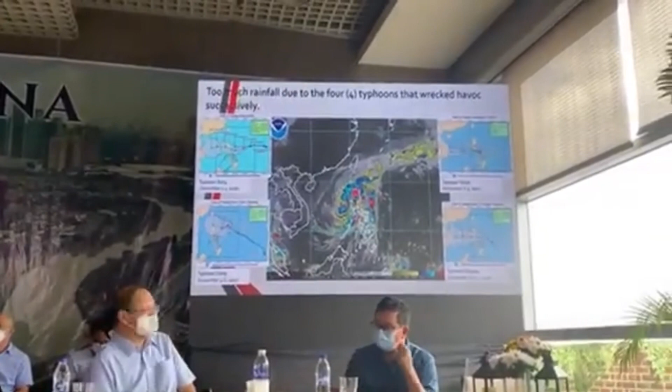Atin po munang bisitahin ano po ba ang nangyari dito sa parte ng Marikina River during that time. If my clicker allows, let me click it next. Series of slides pwede po natin pagbasihan. Actually, it is not only Typhoon Ulysses that affected us. You may focus your attention on the screen. Before Typhoon Ulysses on November 11 and 12, 3 typhoons visited us, this area. Typhoon Rolly on November 1 and 2, Typhoon Siony November 6, and Typhoon Tonyo on November 9.

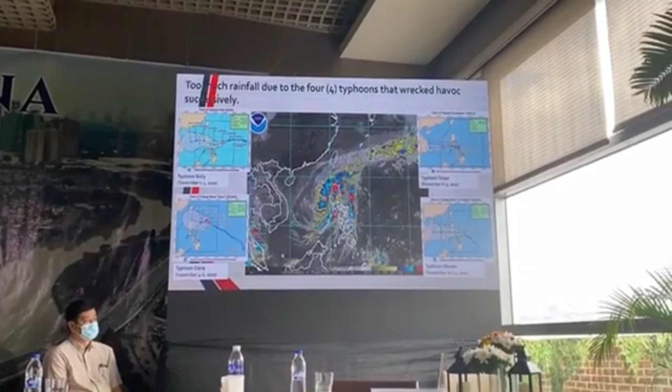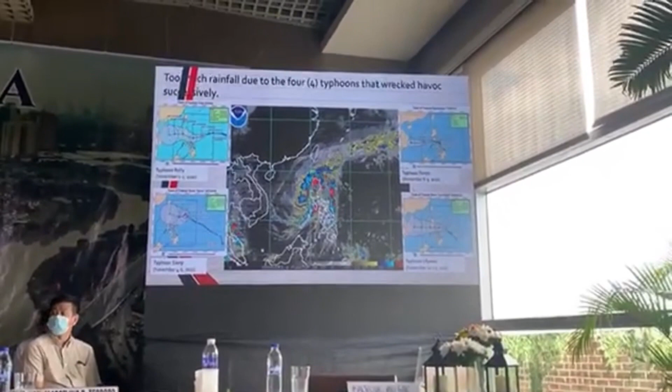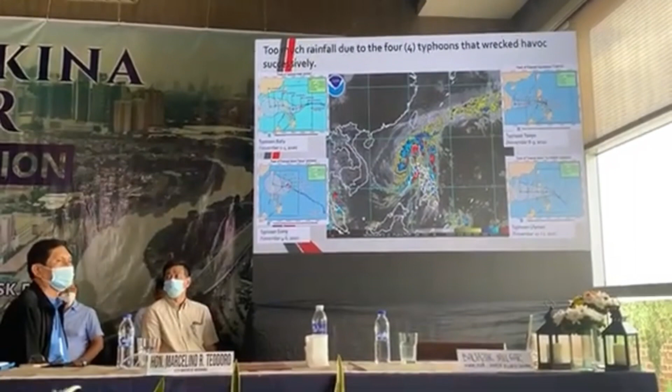So 4 typhoons affected this area of Metro Manila, specifically this area of Pasig Marikina River Basin, that super saturated our area. Ibig sabihin po, basa na ang ating mga tubig, ang ating kabundukan, ang ating catchment area, and with the passing of Typhoon Ulysses, hindi na po kinaya, and Typhoon Ulysses is more than a 1 in 100 return period storm. So napakalakas po talaga yan. And so we saw the pictures during the time. Next, let's just get through pictures.

We woke up in the morning of November 12, kung naalala nyo po, that Metro Manila was hit by a very bad typhoon or flooding that is considered to be highest in recent years. Again, kumpara kay Ondoy in 2009. Kung titignan po natin, Ulysses happened in 2020, just a good 11 years. Nakakatakot po yun. Why? In hydrology, there is what we call probability or incidence, the occurrence of high magnitude typhoons. If a 100-year return period flood would occur bukas, delikado po tayo. If it occurs within a 10-year span, then masyadong malakas po ang magnitude ng bagyo na dumadalaw sa atin.

And with the advent of climate change, there will be more intense, there will be more frequent, and there will be more typhoons coming in the years to come. Ito po ang babala sa atin. That's why we saw in the news, nagulat tayo, baha ang Metro Manila, ang Cagayan, and even Bicol region. And these are the hardest hit provinces that we focus on sa task force, that we will devote our effort in mitigating these floods. Next.

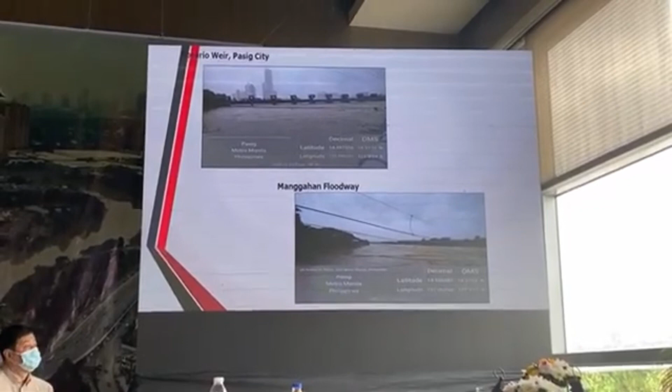Nakita po natin ang Rosario Weir. Ito po yung dinaanan natin kanina if you're coming from Rizal and if you're coming from Pasig. Ito po ay punong-puno during that time. And even the Manggahan Floodway, which is a man-made channel, actually to divert the flow of Marikina River, wag na natin padaanin sa Pasig because Pasig River kapag dinaanan pa ng ganitong kalakas na baha, it will inundate the adjacent municipalities and cities in Metro Manila. But even that Manggahan Floodway was overwhelmed by Typhoon Ulysses during that time.

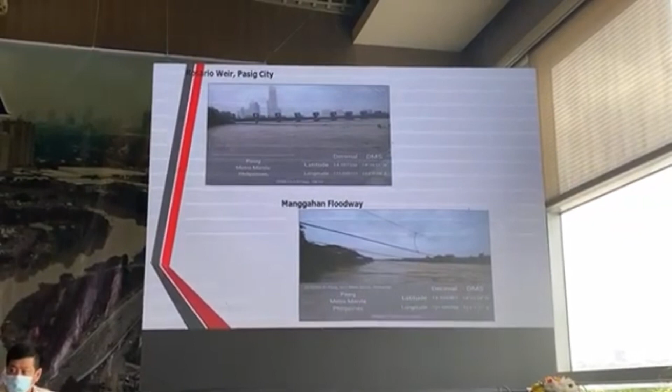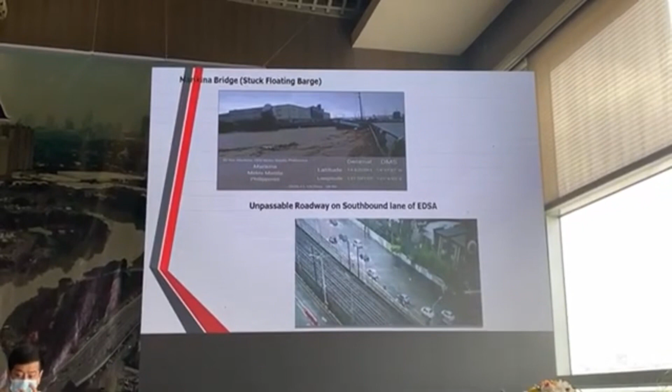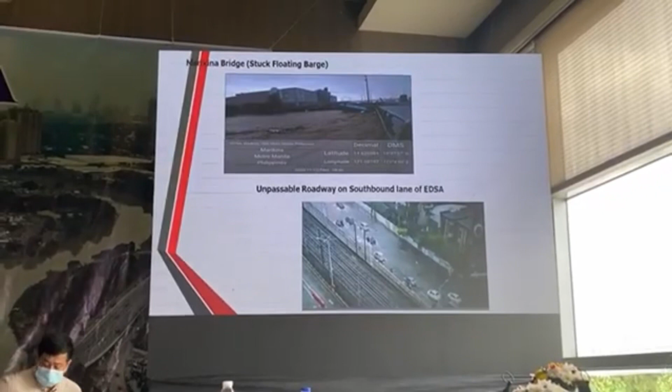Next. We also saw a floating barge itself was stuck, para yan po ay maipit at para yan po ay matrap in Marikina Bridge. It means na ang tubig po ay tumaas, hindi na po makadaan yung ating mga floating barge. Even the main thoroughfare of EDSA was flooded during that time, rendering it unpassable, and really total flooding in these portions of Metro Manila.

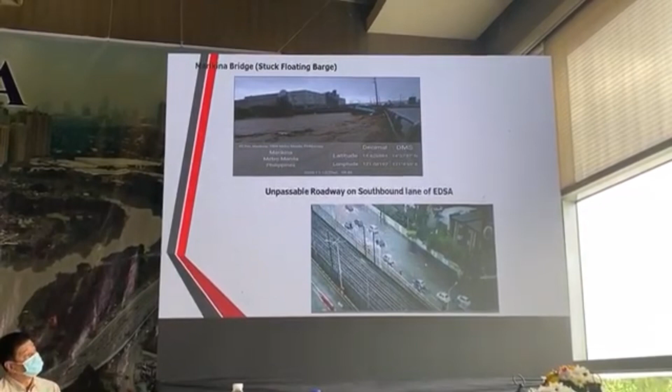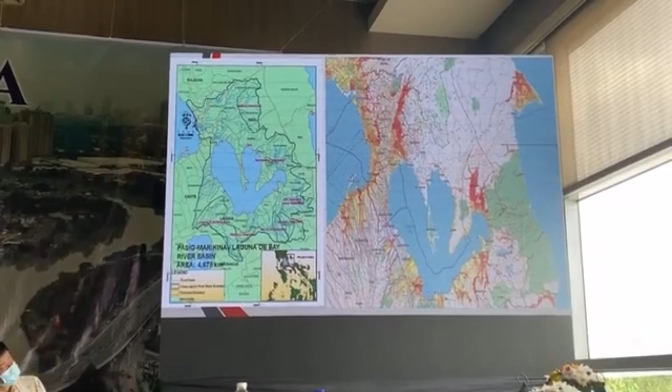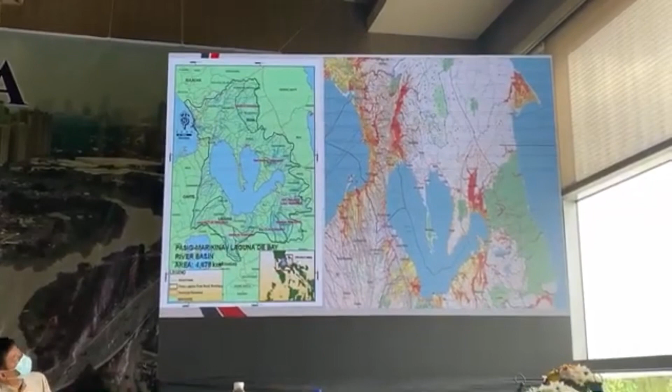Next. And when we try to map it out, tignan po namin bakit bumaha at saan ang mga binaha. We saw the red portions, tignan na lang po natin yung red portions. These are the flooded areas during the time. The upstream of the Marikina River headwater coming from Montalban, yan po ay pulang-pula. Bakit hindi po nakadaloy ang tubig baha ng diretso papunta sa Pasig River or sa Laguna de Bay? At some point, there must be some points of constriction. May pagbara. And we try to map it out and we try to look at it and we identify these areas. Next.

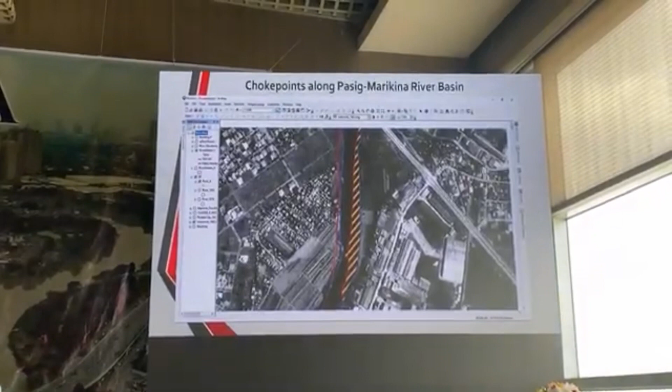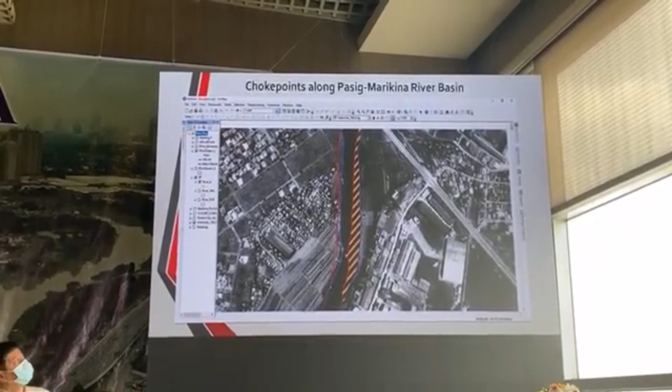There are choke points along the Marikina River Basin as identified by the DENR National Capital Region. Sila po ay nagkaroon ng ground truthing, drone survey and ground truthing. Ground survey, they saw that these portions actually are the narrowest points of the river. Ano po ibig sabihin nun?

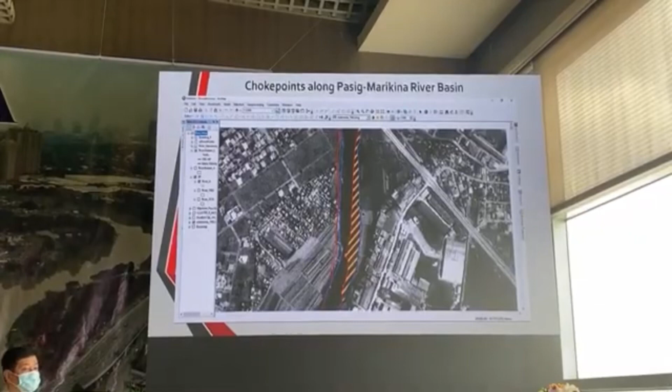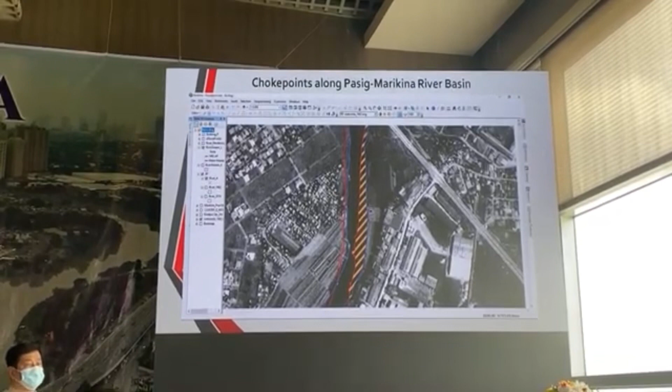If the river is a highway, meron pong mabagal na sasakyan na dumadaloy dito. That's why the slowest velocity or speed of that sasakyan will be the speed of the whole highway. Ganon din po sa ating ilog. Kapag merong point of constriction, nasabi po kanina ng ating butihing mayor that we need a good 4 meter per second. Thank you sir for that very technical understanding.

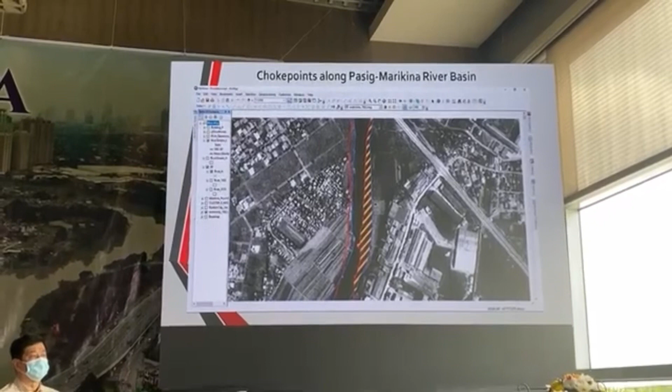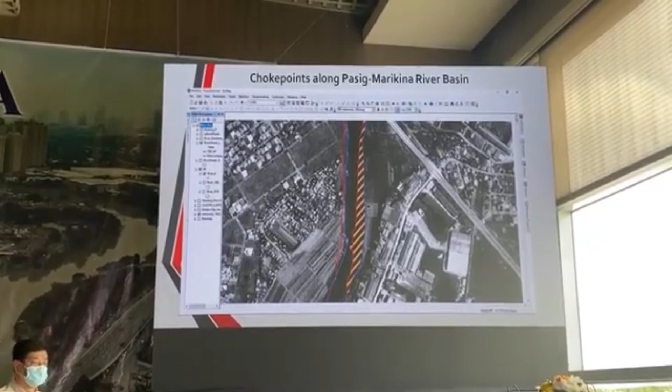Nung sinabi ni mayor yun, nakahinga na po ako. Being a hydrologist, we know for a flood water to egress, lumabas, kailangan po natin a good velocity. And that is the point of this Pasig-Marikina River Channel Improvement Project under the DPWH. We will be constructing river walls along this line of Marikina and Pasig River.

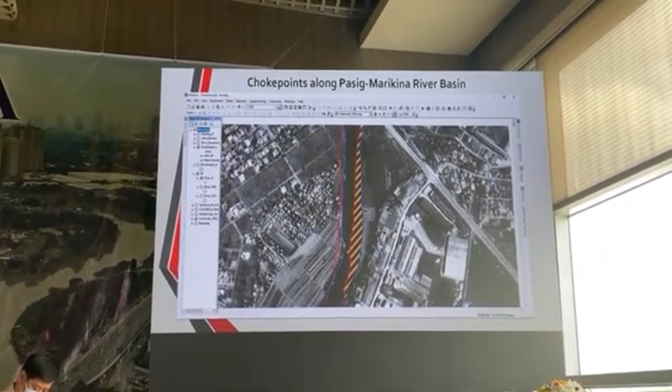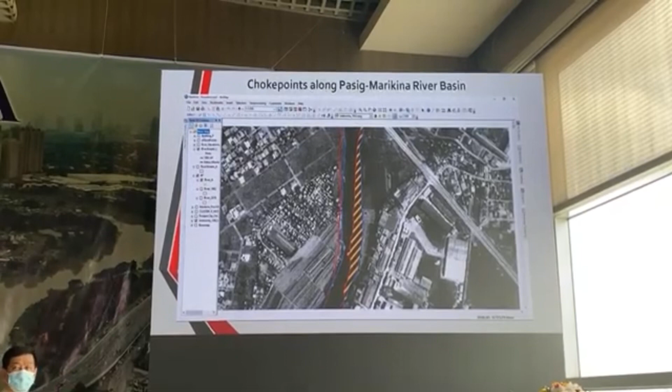And we have done phase 1, 2, and 3. Nasa phase 4 na po tayo this year. And I hope and we pray na ito po ay ma-implement so that we can increase the velocity of our river. Next. And when translated, we saw that from the old NAMRIA map, this is the old map, ito po yung basihan natin ng alignment ng ating ilog.

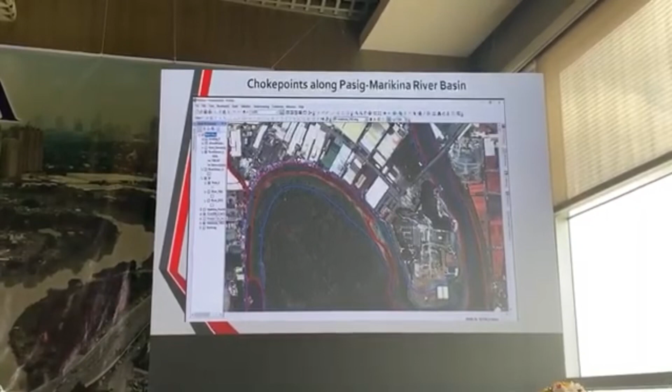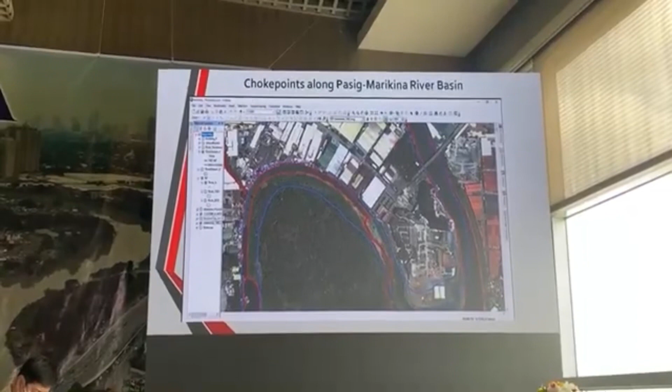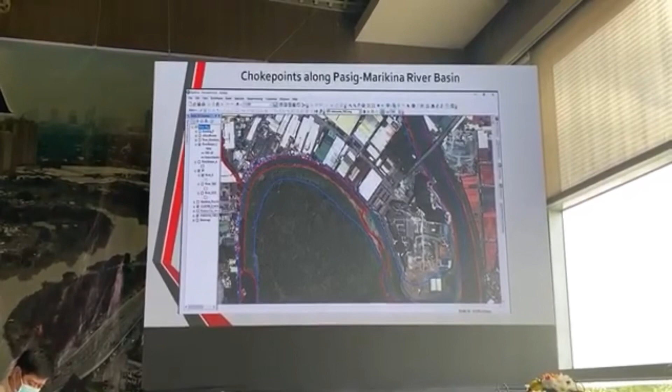We saw that there are constrictions and even sandbars. These are the natural deposition of rivers, accretion of the soil, deposition of sediments in the river that form as a landmass inside. Lumiliit na po, ang ibig sabihin, sumisikip na ang ating kailugan, and we need to remove this to rehabilitate and to restore the Marikina River.

Next. From that image, pumunta naman po kami sa DENR NCR and the LRA, and we were able to identify these lots, these properties, these parcels of lands that go inside the river. Ang record po niya nasa atin sa DENR, and this we try to enumerate. We have a list of this and we try to look at this.

For simple understanding po, yung pula, yan po yung category 1 na tinatawag natin. Meaning, ito po yung mga lupa-lupaan na nasa ilog that is both unclaimed and untitled. And we try to focus in removing these red parcels of lands. Okay? So with this understanding and with this knowledge, we come up with a dredging plan. And we will go into that next slide.

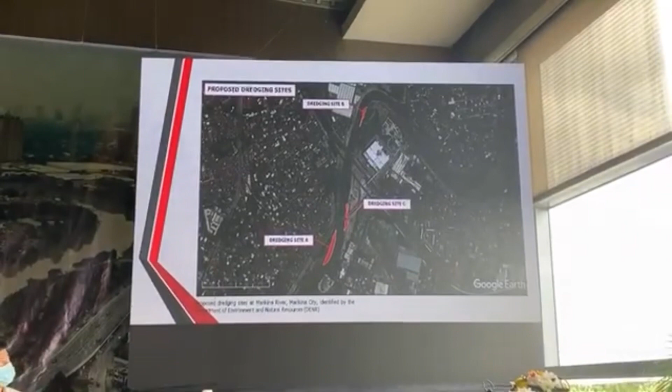For the river plan or the dredging plan of Marikina River, we were able to come up with the priority, phase 1 of the dredging. Ano po ito? Actually, 3 sites po yan kasama. If we are in SM Marikina now, the part of this sandbar just in front of us sa ilog, yan po ay part of the sandbar also. We will try to cut, tatabasan po natin.

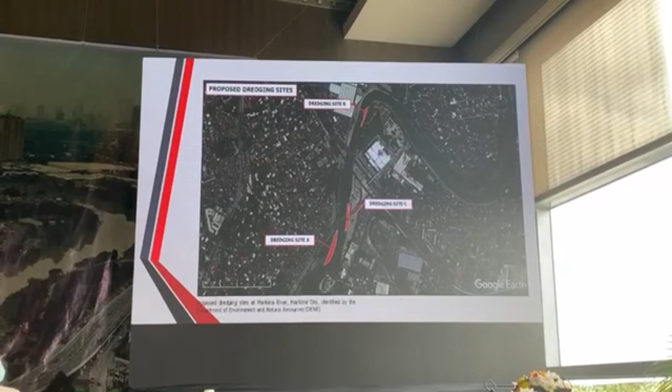But as it is, we identified 3 big sites: Site A, Site B, and Site C. Site A, being yung Olandes sewage treatment plant po na tinayuan natin kanina, this is the priority site for phase 1 of the project. Then we will go into Site C, which is the East Metro Terminal part natin, and then Site B, which is the SM City Marikina part of the sandbar.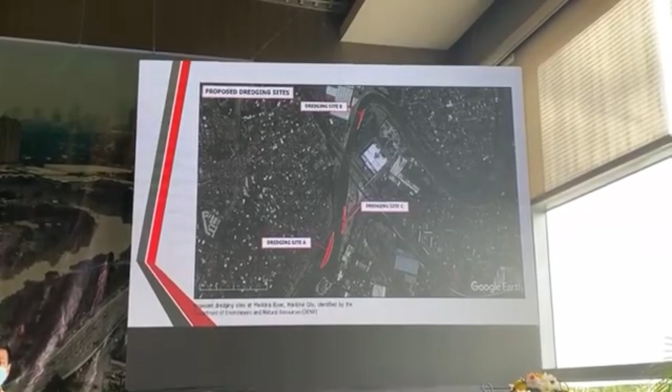Next slide. If we have to look at each and individual sandbar, makita po natin dyan yung area. Ito po yung tinatawag natin na surface area. But do not be misled. Ang liliit naman yan, no. Surface area represents only the part that you can see from the satellite image. Just like the iceberg that sunk the Titanic, malawak po ito sa ilalim.

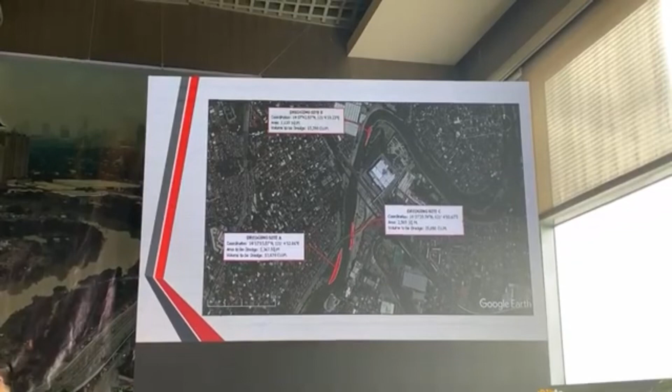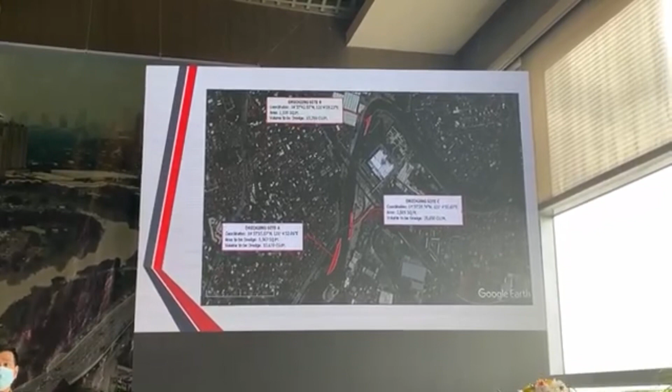In fact, we were able to compute the volume to be dredged for each and individual site. For Site A, around 53,000 cubic meters. For Site B, around 15,000 cubic meters. And for Site C, we have a good 25,000 cubic meters. To give you an understanding, ang isang dump truck po is just 10 cubic meters, the big dump trucks. And we are talking here of thousands of cubic meters to be dredged.

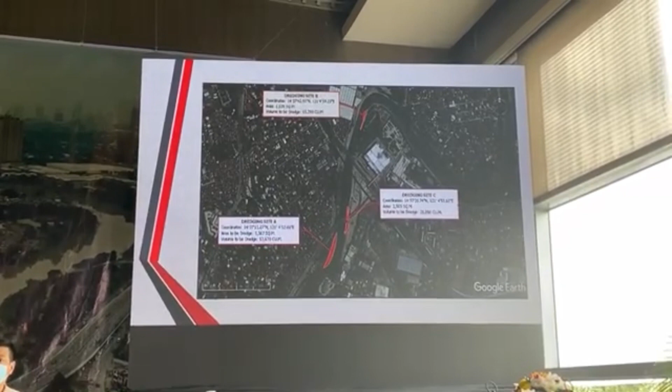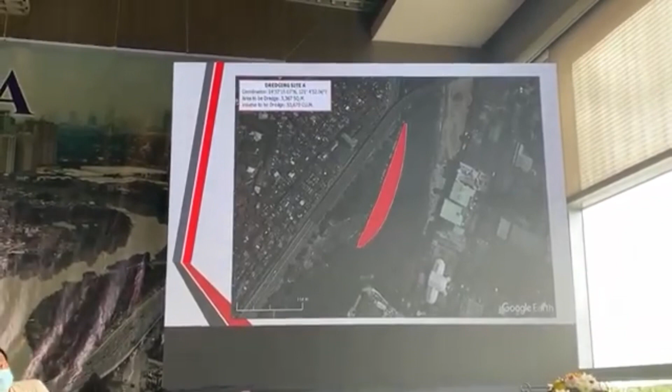Is it an easy work? No. We have to admit, it is a hard work and we will do it systematically with the help of DPWH equipment and with the augmentation of the AFP through its Army and through its Navy, the Seabees. Next. For Site A, this is the focus natin kanina, yung ating pong inaugurate, around 53,000 cubic meters. Next slide.

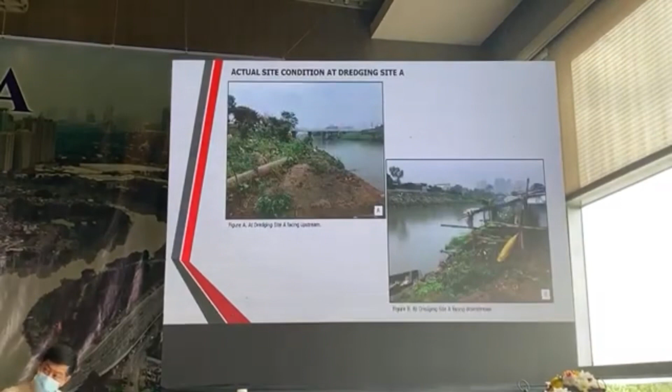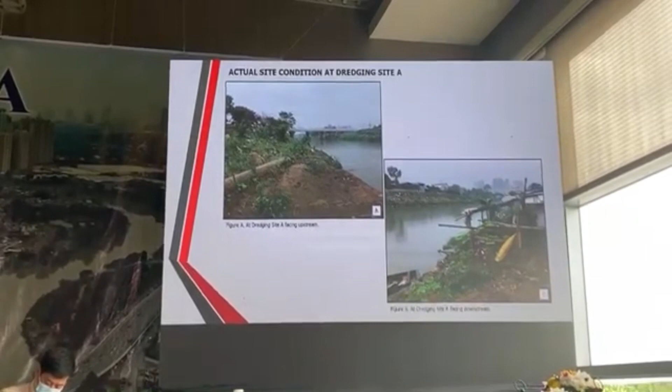This is the site that we identified. We actually would like to make a limit of 5-meter easement. Kung meron po tayong alignment ng project that will come on later in the last quarter of this year, magsasetback po tayo around 5 meters wide so that we will not disturb yung pathwalk doon. We will not disturb the alignment of the sheet pile where it will be driven and where the dike will later stand on. So yan po ang ating alignment.

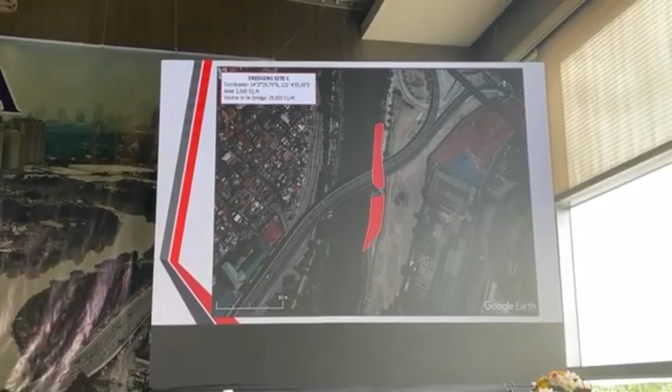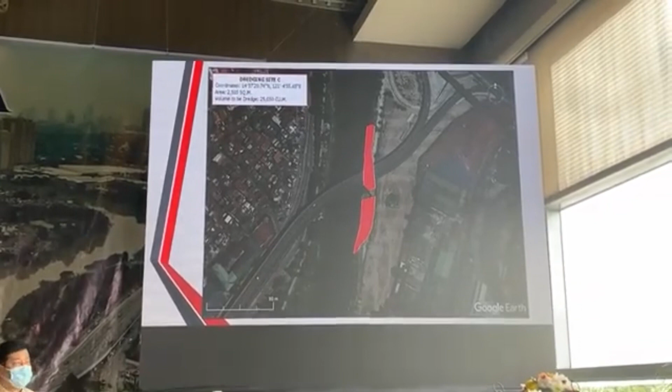Next. And as we speak, yung ating po mga tao sa ground, they are laying yung mga staka and the pole so that we will be able to identify it. Next slide is the Metro East Metro Terminal right under the bridge. Ito po, this also the sandbar formed, around 25,000 cubic meters. It has to go. Next. That is the condition at Site C.

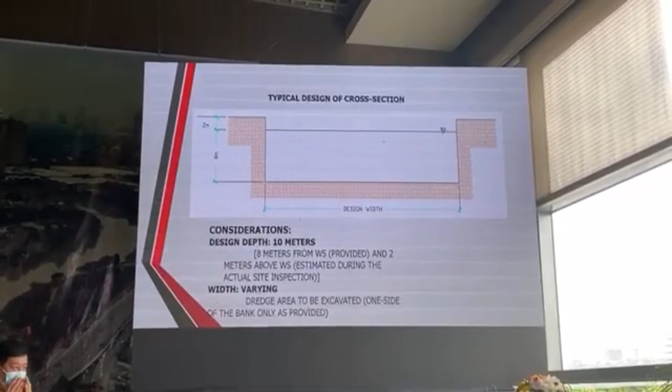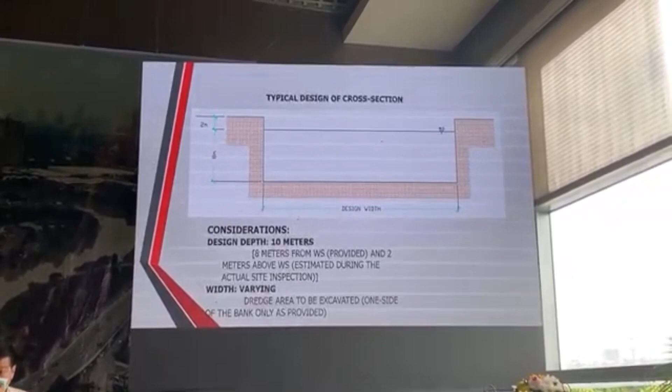Next slide. What is our dredging design? Ano po ang strategy that we will employ for the dredging? Next slide. For this dredging, ang ilog po ng Marikina, we are very thankful malalim. Around 10 meters or 8 meters on the average ang lalim ng tubig Marikina po natin. But when you go down sa Pasig River, around 5 meters, nagiging kalahati ang lalim. Ang luwang po is around 70 to 80 meters. The design should be around 90 meters.

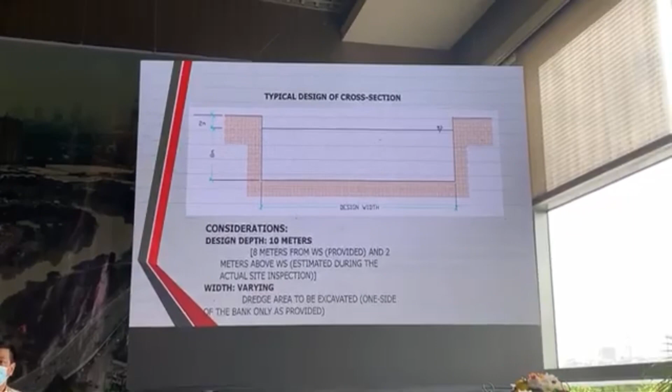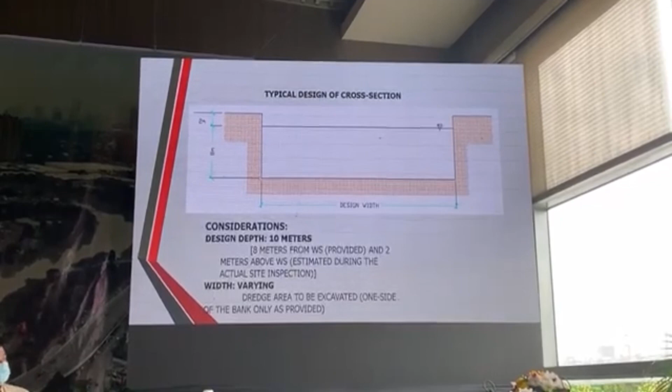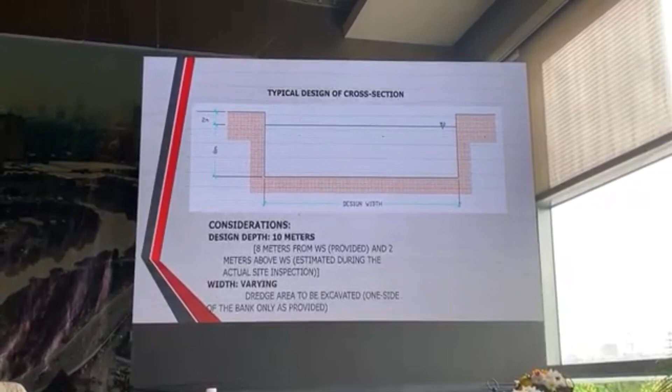So, what we will do, we will dredge. Huhukayin po natin yan ng 8 meters deep and another 2 meters. For the highest water level, we will allocate a freeboard. Ito po yung freeboard na 2 meters para po hindi umapaw, sakali ulit dumaan ang isang bagyo na katulad ng magnitude ni Ulysses. So this is the strategy of dredging as presented to us by the Bureau of Equipment through Director Noel Ilaw of the Bureau of Equipment. They prepared this one. Next.

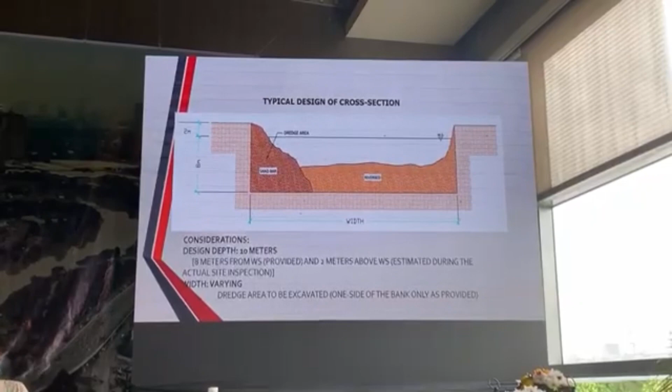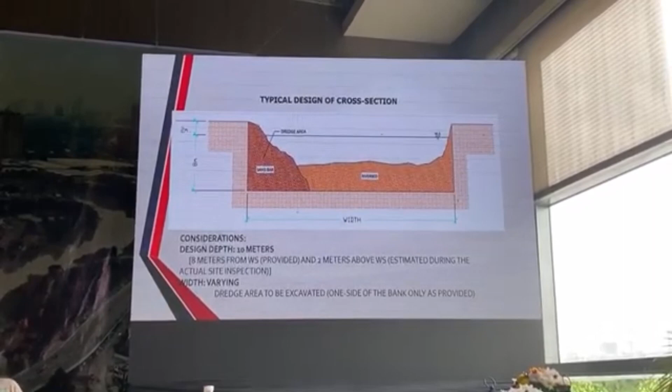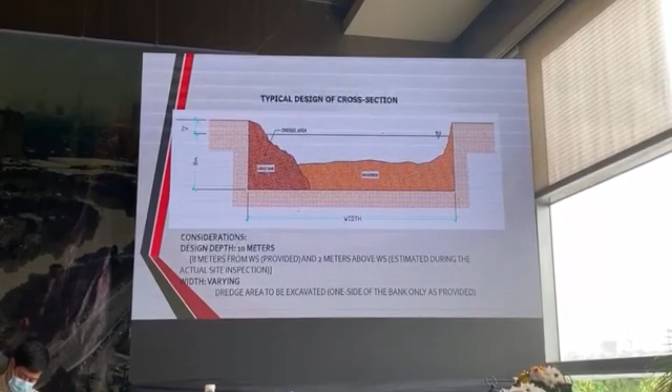Ang mga sandbars and the siltations that we have, nakita po natin kanina that is the ideal condition in a laboratory. But kung titignan po natin ang kailugan natin, it is already silted, its riverbed masyado na po mataas at mababaw. And with the sandbars formed at both banks, ito po yung ating tatargetin for a 10-meter depth of dredging. And when we remove this, it will not only increase the water capacity of the river, but will also improve the water quality of Marikina River.

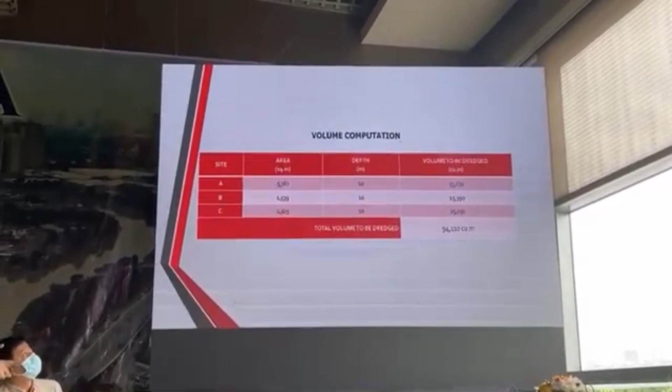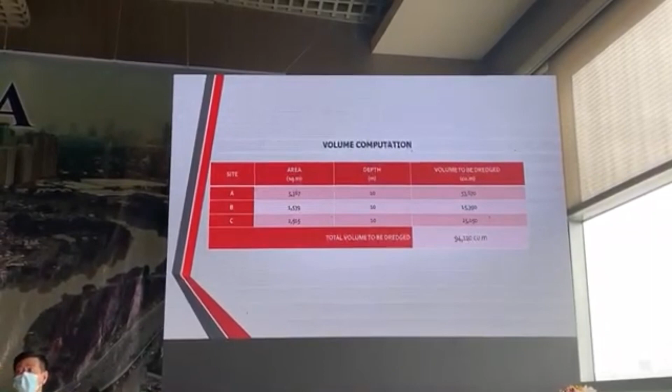Next. For the volume computation, gaano karami ba ang ating mahuhukay for each site that is presented as prioritized, to have the corresponding volume to be dredged. Total volume around 95,000 cubic meters. Next slide. And for the dredging implementation, you may ask, gaano katagal ba ito gagawin? We have here the schedule and the kind of equipment that we'll be needing.

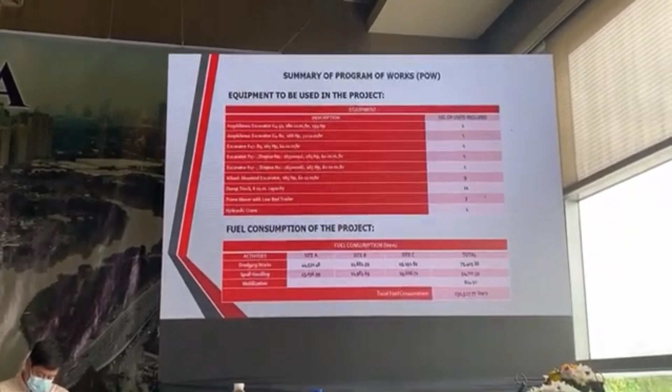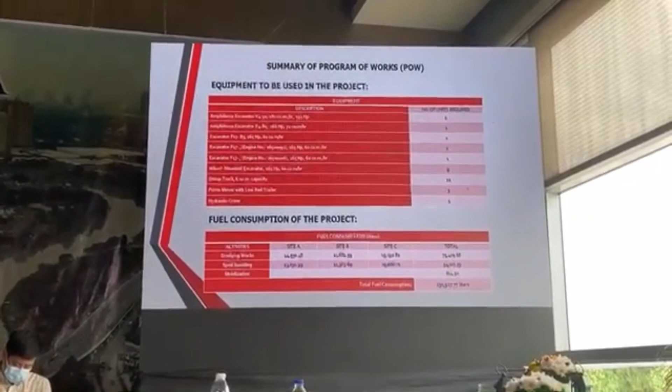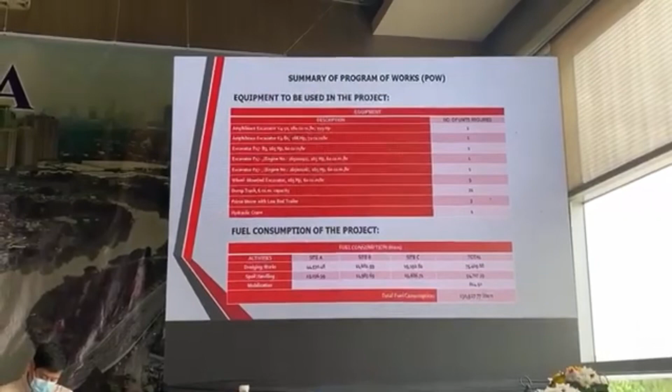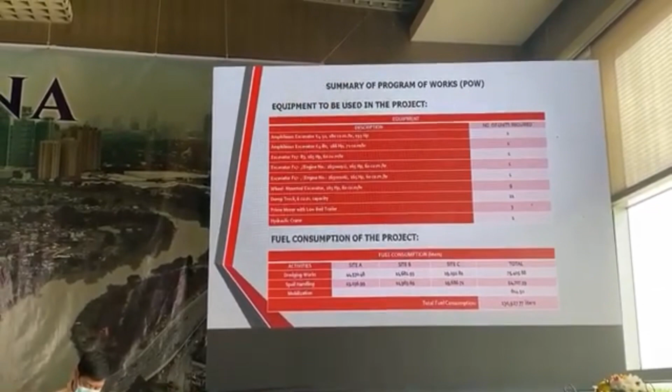So far, and as we speak, the DPWH through its National Capital Region through Director Eric Ayapana and its able 9 district engineering offices has committed around 20 dredging equipment. And yung contribution pa ng Army, a good around 30 heavy equipment will be deployed for this operation. When we started Build Back Better Task Force, sa Cagayan po, we devoted around 40 heavy equipment, dredgers and hauling equipment, dump trucks. Ang tanong namin, kaya ba natin i-sustain?

Thankfully, when we had this call for the deployment of equipment, the AFP through its Army and its Navy, together with the district engineering offices of the DPWH, heeded the call and they deployed their own equipment. So thankfully, if we can do it for Cagayan, for Marikina, next third part will be in Bicol, we will also do the same. The total activities we have here, the amount of equipment and the amount of fuel to be consumed to sustain dredging equipment, thankfully po, part of this planning is the allocation of resources in order to sustain this operation. Next.

All in all, gaano katagal? We will devote a good 1 to 3 months of operation. If we start by this February, and as we speak, habang nandito po tayo, hindi po ceremonial lang yung nakita nyo kanina, and as we speak, gumagawa na po yung ating mga equipment. And they will be there in the coming days. Ano po makikita natin? There will be dredging operations. There will be hauling to spoil sites.

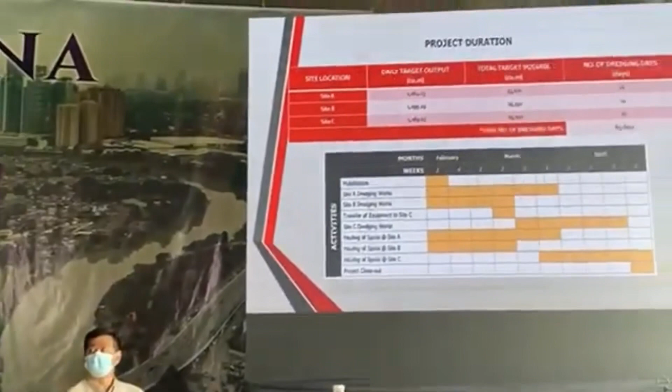There will be hauling of dredged material to the spoil sites, both in Lupang Arenda that we have identified and in the proposed Barangay Nangka by this good LGU, the City of Marikina. Maraming salamat po. And by the end of April, we will see a significant accomplishment of this dredging activity in time.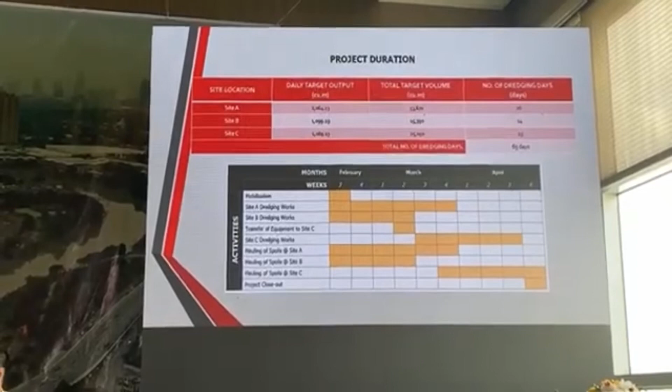Tama-tama pagdating po ng Mayo, Hunyo, yan po ang pasukan na naman ng bagyo. That's why we will see the effect of this. And next slide, the methodology to be used, ano po ang gagawin natin?

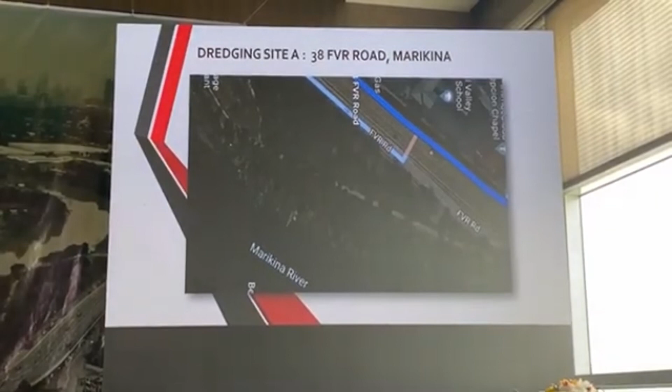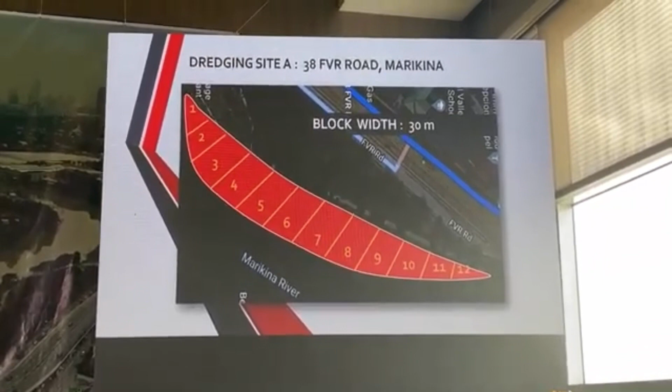Sige po, this is some sort of an animation. Just click on the next slide. If this is the sandbar, hindi po kasi mainam na we have to allocate areas first and we divide it into 12 segments or 12 blocks as we call it. Ito po yung strategy natin.

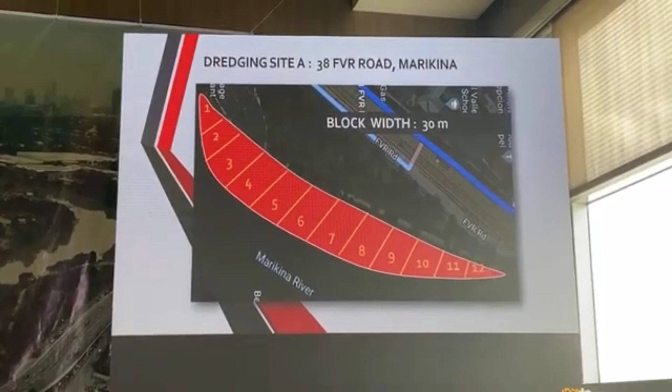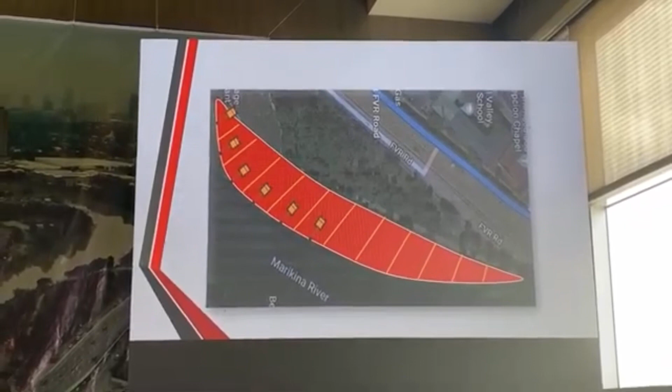We will allocate excavators, mga backhoe, and then together with the hauling equipment, yung mga dump trucks tatabi. And because these are long reach arm backhoes and even backhoes that can go inside the river and come out, amphibious po tawagin natin, yung pwede sa lupa, pwede sa ilog, they will just place it on the hauling equipment to be transported or hauled in our designated spoil sites.

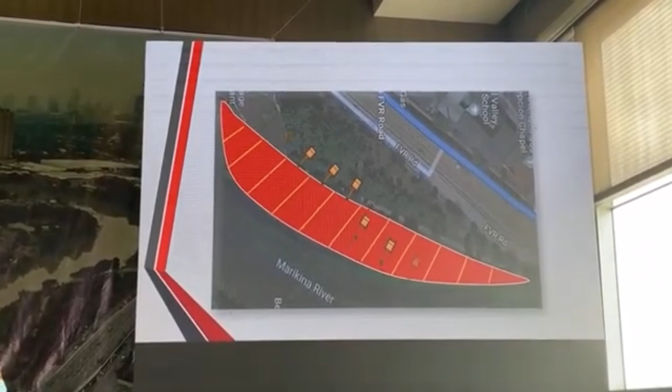Sige po. So you can have an image of what we will do in the coming days. Sige lang po, pakiclick. You will see that we will do it block by block, put it in a temporary spoil bank like that or piling.

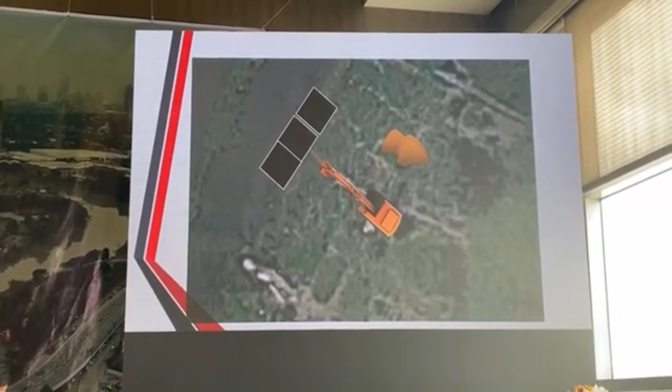But if the soil or the ground allows, we can immediately put it in the dump truck. Kasi po, nung nasa Cagayan, all the different riverbed materials, sandy loam, meaning nahihirapan yung mga dump trucks natin, especially with the wheeled ones. Nahihirapan po. So for this, nakita naman natin mukhang stable dito. We can always readily put it on our dump trucks to be hauled at designated spoil sites.

Next, so there will be also dewatering time. Alam naman po natin that ang hauling natin ay by land. Kailangan po natin patuyuan yan. This will actually slow the operation a little. Why? Hindi po natin pwedeng ilagay yung parang nilugaw na dredge material immediately to the dump truck at ibabiyahin natin.

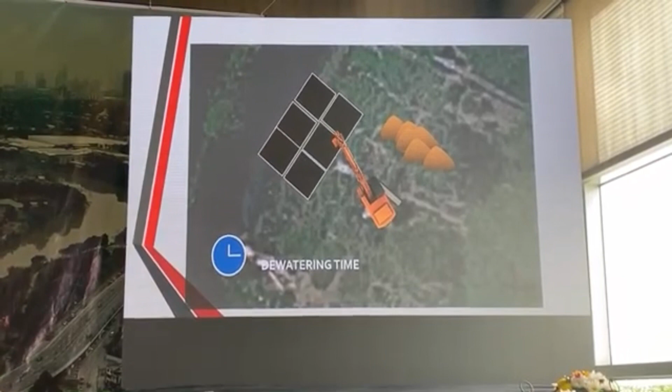Tayo po ay pagagalitan ng mga LGUs na dadaanan natin. Magpuputik po, and it will damage the roadway. That's why we have to let it set for the meantime, para matuyo, dewatering before we haul it out.

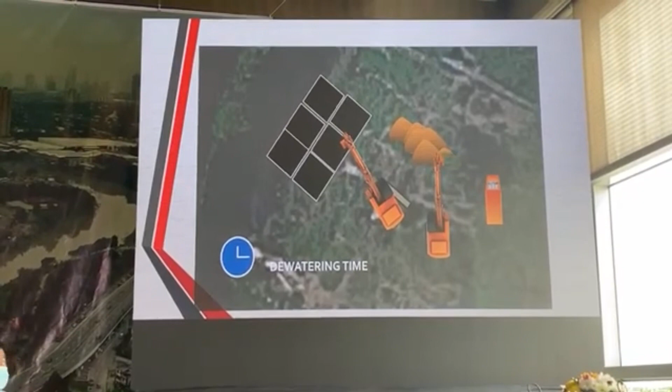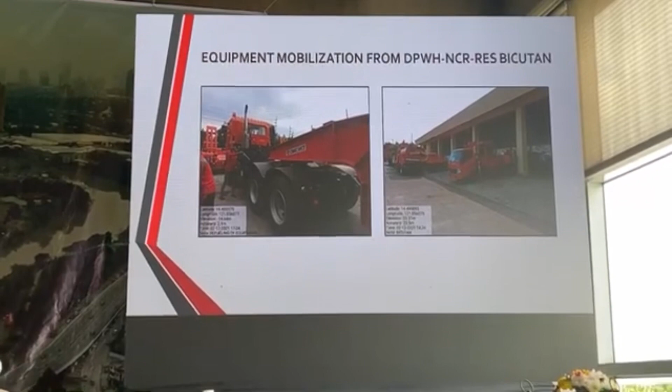Next, and there will be the equipment to do that. Next. Sige po, animation na lang yan. And siguro yung last part ng presentation will show you the equipment that we have mobilized and deployed so far. Sige po, we have this equipment coming from our DPWH NCR regional equipment facilities in Bicutan, na-transport na po rito.

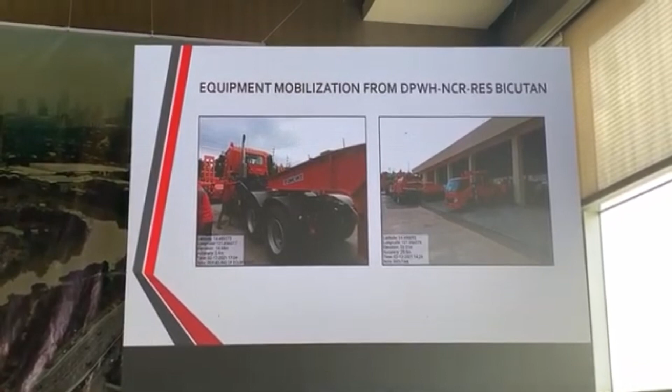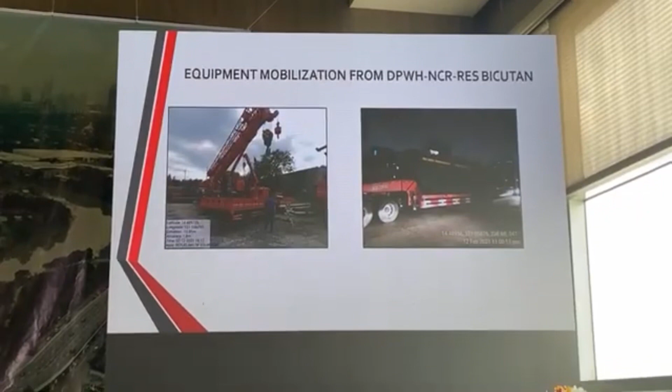And you might have seen, nakita nyo po, yung dalawang malaking amphibious excavator, and these are actually the ones that will do the bulk of the work. Next. Sige po, so you can just click on it and makita nyo po the equipment that we have. Like I said, around 30 equipment to be deployed in this site.

When we started this po, ang sabi sa amin ni Secretary Mark Villar sa DPWH, never leave any stone unturned in terms of flood mitigation and in deployment. Utilize the resources that we have in DPWH in order to assist the flood-affected people. Ang totoo po, with this kind of project, many would have a say or two na wala naman kaming nakikita or dapat kalsada or dapat tulay. We can always do those things, those projects.

But you know, when it comes to the context of flood mitigation, building a culture of prevention is never easy. Napakahirap po. In fact, the benefits, ano ba yung makikita natin dyan? We might not see it now. But the benefits of prevention will be visible in the distant future. In fact, these benefits might not be tangible, hindi pa natin makita. But actually, the benefits will come in the form of the disasters that we will prevent happening in the future.

And with that, Secretary Mark Villar, as represented by Undersecretary Robert Bernardo: Sir, we have delivered our equipment here. Secretary Roy Cimatu, we were together in Cagayan, and we rolled out our equipment. The equipment are here again, sir. They are ready for your disposal. Lead us, and we will roll as one. Maraming salamat po.